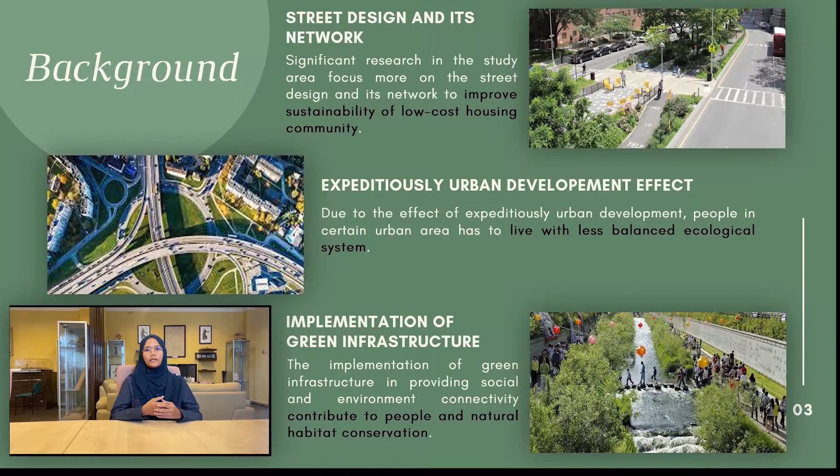However, before coming out with the literature reviews, the issues on urban green infrastructure, especially in low-cost housing area, have been identified. Firstly, human settlements and the changing land use threaten the lack of integrated natural ecosystem as the wildlife corridors. Second, there are insufficient pedestrian and cyclist paths. A path that connects places in low-cost housing communities is exposed directly to heavy traffic routes. Thus, the local communities are affected by harmful impact pollution due to its heightened level at the road edge in very dense urban centers.

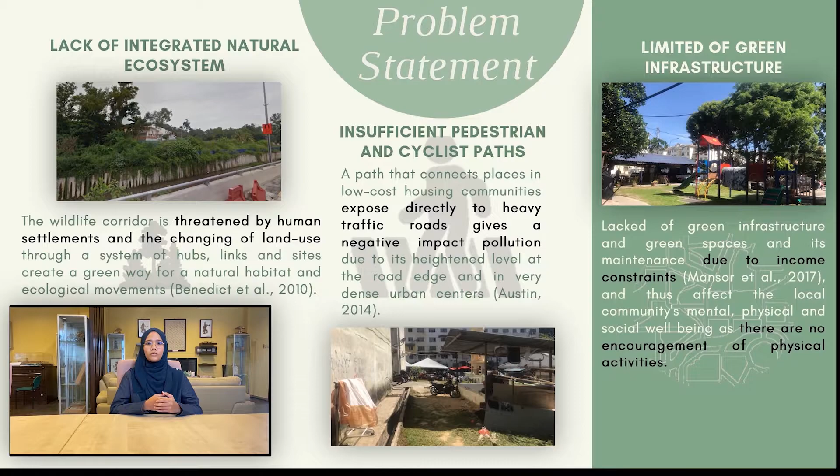The third one is limited green infrastructure. A lack of green infrastructure and green network and its maintenance, mostly due to the income constraints. This problem thus affects the local community's mental, physical and social well-being as there is no encouragement of physical activities. Moving to the next slide.

This literature review will be focused more on the subject of urban green infrastructure, low-cost housing in Malaysia and sustainable low-cost housing development. The first subject of urban green infrastructure defines its planning as an approach that aims to create a network of multifunctional green spaces in the urban environment. Interlinked with it, green infrastructure is a planned and managed system with conservation value to maintain a natural ecological process. However, green network focuses on the flow and movement of social, biological and physical environment functions of green spaces and their interactions. Consequently, green infrastructure network is connected green spaces.

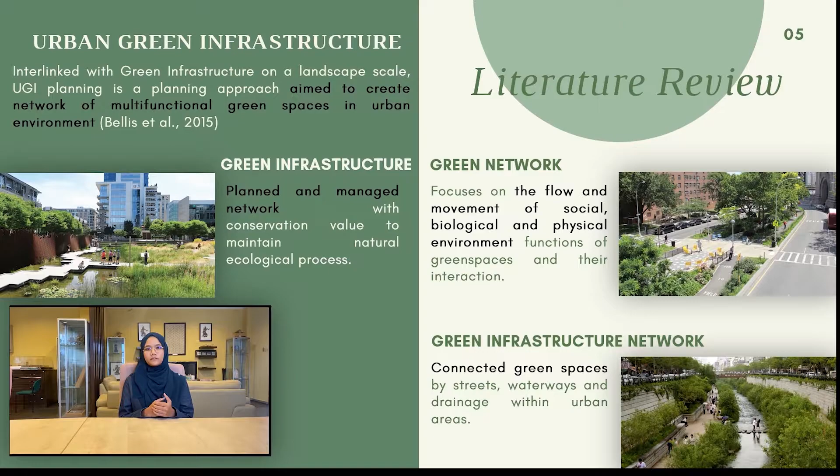Next, on the subject of low-cost housing in Malaysia, there are 4 policies to be acknowledged as low and middle income housing. The first policy is that it requires all private developers to construct at least 30% of low-cost housing units component. Secondly, the house built under the low-cost component can be sold only at a price not exceeding 25,000 ringgit. Next, buyers of the low-cost units must have a combined household income not exceeding 750 ringgit per month. Last but not least, the policy specifies that each low-cost house must have a minimum built-up area of 550 to 600 square feet comprising 2 bedrooms, a living room, a kitchen and a bathroom.

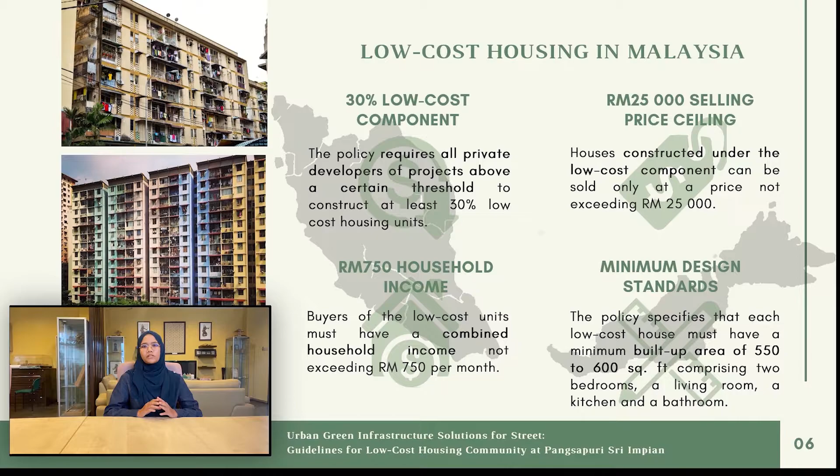Moving on to the next subject, in regards to the housing as a basic human need, it must provide a comfortable feeling to create a sustainable living. Thus, sustainable low-cost housing development has come up with 4 main criteria, which are ecological sustainability. It explained that any development activities should not produce more waste and pollution that can bring damage to the natural environment. Besides, economic sustainability stated that it must be affordable and accessible for the beneficiaries and local authorities responsible for maintenance services. Whereas, on behalf of social sustainability, it must promote a sense of community and safety that contribute to the physical and psychological well-being of the inhabitants.

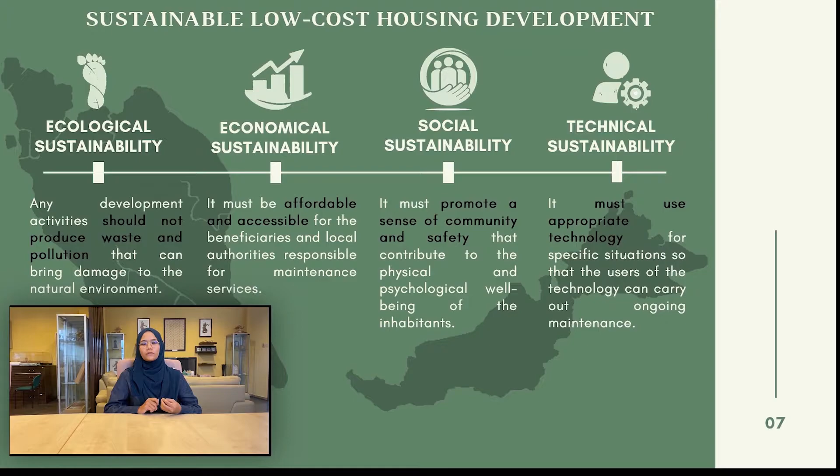The last sustainable low-cost housing development criterion is it must use appropriate technology for specific situations so that the users of the technology can carry out ongoing maintenance to achieve technical sustainability. Thus, to achieve the aim of the study, which is to identify the guidelines for the street as a green infrastructure network in a low-cost housing community, there are three main objectives to be followed. First and foremost is to identify the good characteristics of a green infrastructure network to fulfill local community well-being and needs.

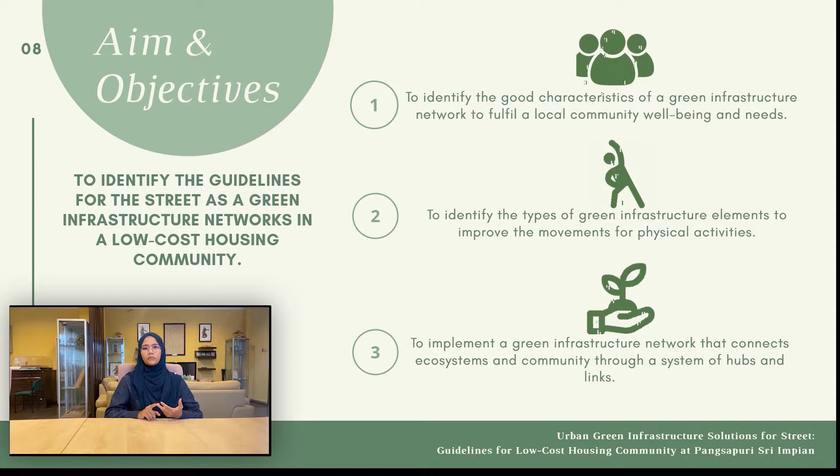Secondly, to identify the types of green infrastructure elements to improve the movements of physical activities. The third one is to implement a green infrastructure network that connects ecosystem and community through a system of hubs and links.

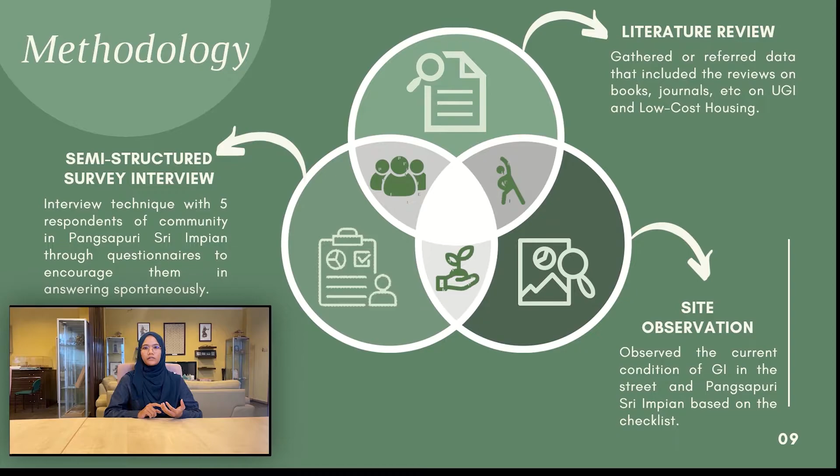To fulfill this aim and objective, there are three types of methods that have been used throughout the study, which are literature review for secondary data, semi-structured survey interview, and site observation for primary data collection. For the method of literature review, gathered or referred data that included reviews of books, journals, etc. on the main subject of urban green infrastructure and the low-cost housing concept are analysed to achieve the first and second

objectives, while by undergoing site observation to identify the current condition of green infrastructure on the street and the study area itself in Pangsapuri Sri Impian, Ukay Perdana, the second and third objectives can be fulfilled. The last method that aims to accomplish the first and third objectives is the semi-structured survey interview.

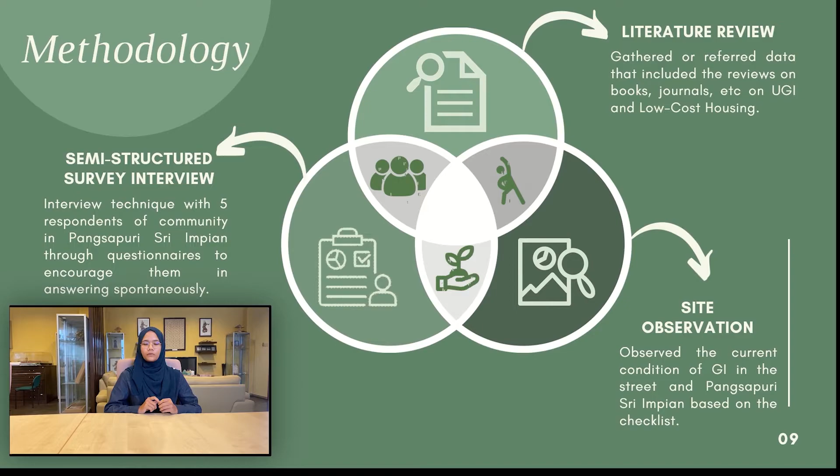The interview technique with 5 respondents of the local community in Pangsapuri Sri Impian, Ukay Perdana through a questionnaire to encourage them to answer spontaneously. Next, there are results and findings. They are the most crucial stage before developing a design recommendation at the end of the study.

The application of urban green infrastructure on the street has been identified in 3 categories. The walkability and connectivity cover the connection and accessibility of the pedestrian network to amenities and services that comply with barrier-free design. The next one is integrating a natural boundary that can be used as a buffer for visual and noise pollution produced by motor vehicles from the street.

Urban tree canopy and planting strips are examples of a natural boundary that can be implemented along the streets. Last but not least is implementing a green network. Green parking with the elements of permeable pavements, planter boxes, and bioswales enables the infiltration of stormwater runoff.

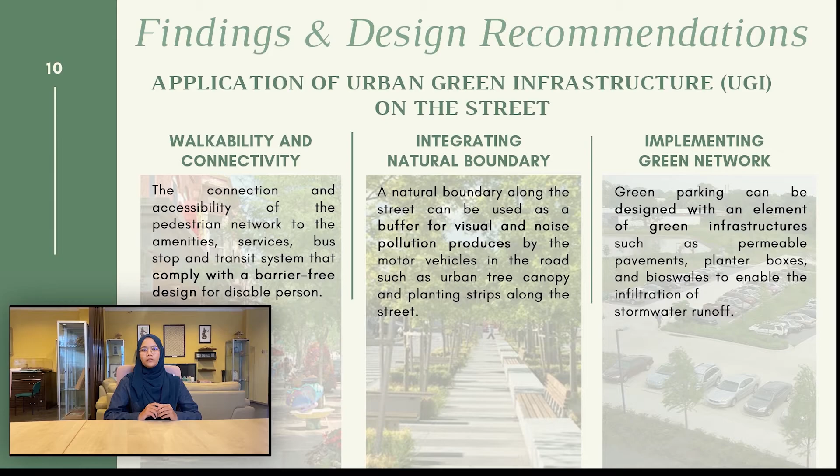As shown on the slides, there are examples of the application of urban green infrastructure on the street, and through the method of site observation, the current condition of the street in the study area has been identified. It is shown that most of the streets in the housing area are not in a state that benefits the community's well-being. In contrast, no pedestrian accessibility connects amenities and services.

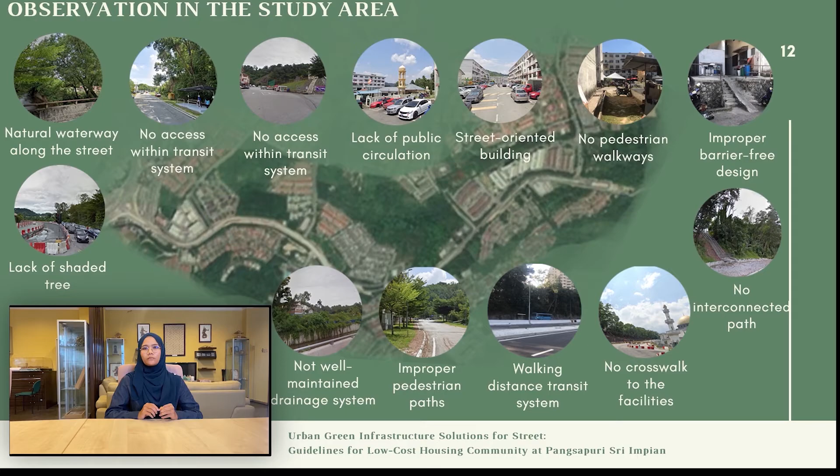Although it is located within walking distance. Other than that, the current street condition needs to improve a lot in terms of green infrastructure and green network. Next, as a design recommendation is the last stage of the study, a design layout of urban green infrastructure on the street has been proposed.

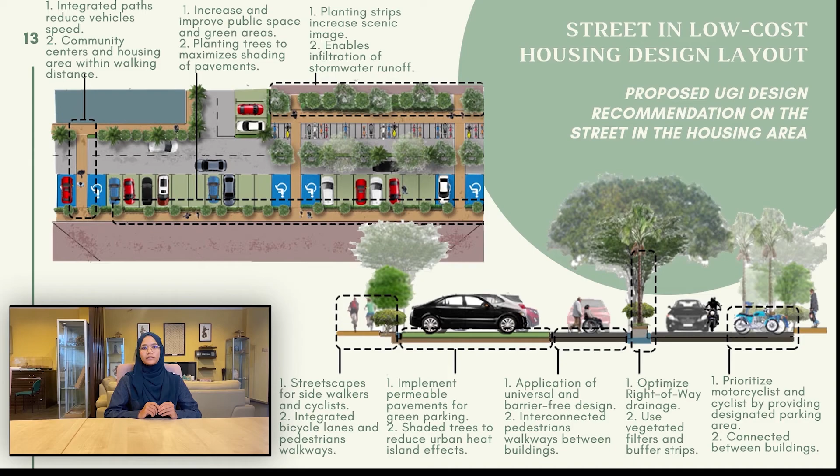In the street in the low-cost housing area, integrated paths with barrier-free design that reduce vehicle speed also function to connect community centers and the housing area within walking distance. A green network in the parking area with the implementation of permeable pavement and shade trees can reduce the urban heat island effect. Planting trees that maximize shading of pavement improves public space and green areas.

The next one is a proposed street design layout that comes out with a natural boundary as a buffer and maximizes shading through the application of urban tree canopy. It also acts as a greenway that helps the movement of natural habitats. The streetscape along the pedestrian walkways helps in improving public spaces and green areas.

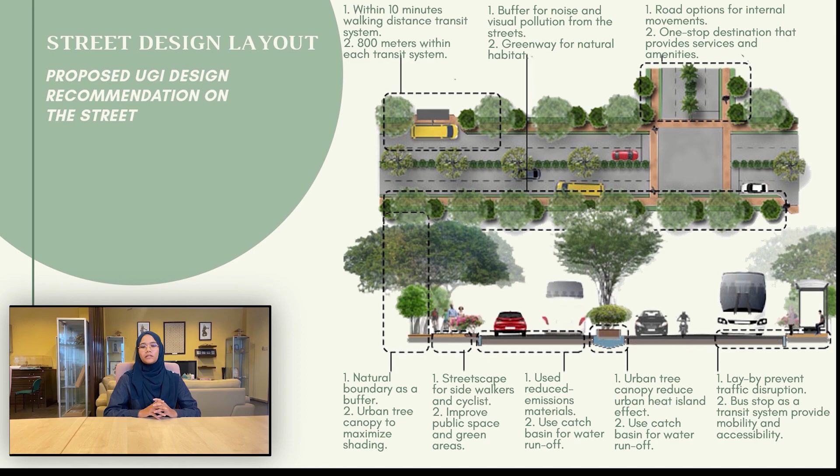With the use of reduced-emission materials on the street and urban tree canopy, it can reduce the urban heat island effect. Plus, the use of catch basins for water runoff. Also, a transit system should be designed within 10 minutes of walking distance. In conclusion, urban green infrastructure in low-cost housing should be acknowledged to fulfill local community needs and well-being.